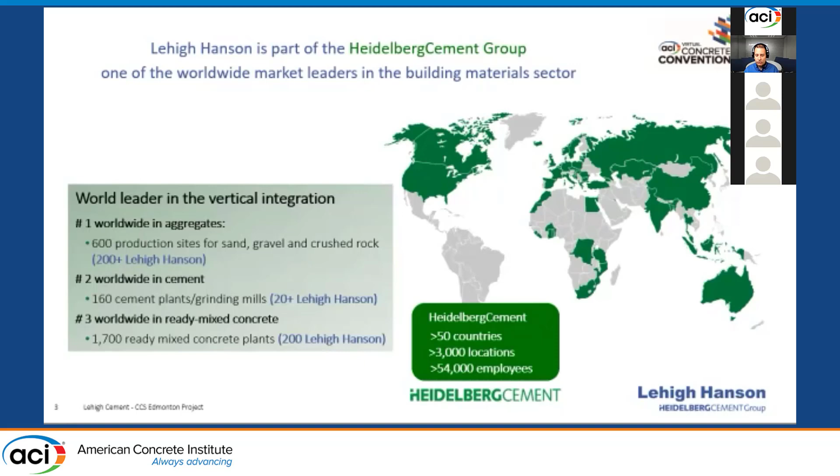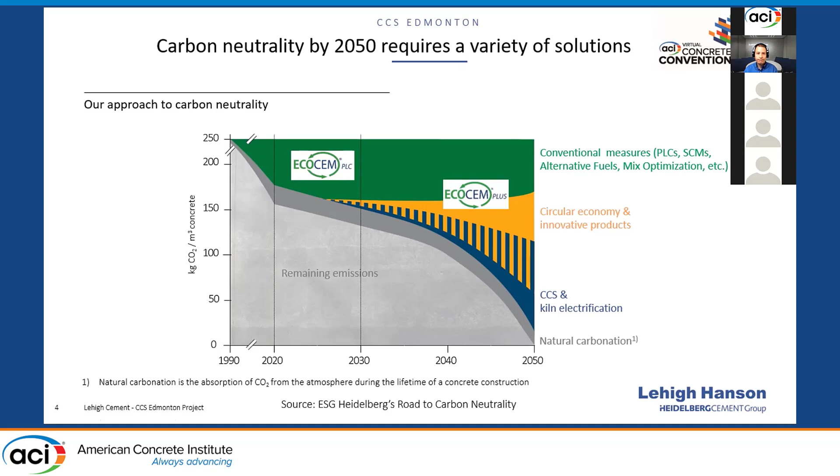Let me start with a brief description of each, and then I'll go into the next slide, which has a video that does a much better job of explaining it, showing exactly from the cement process how each of these technologies works.

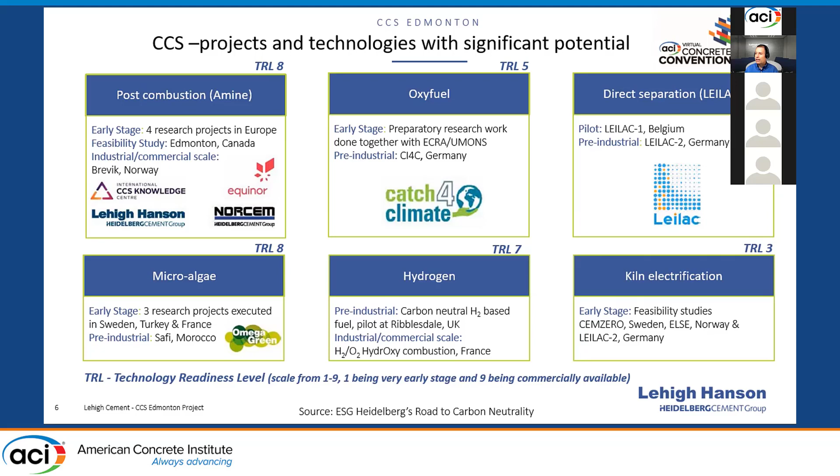Okay, so without further ado, I will start a quick video here and hope that this enlightens. It's very basic, but it does give a much better perspective of each of these 3 technologies that I just shared with you.

Reducing CO2 emissions while producing enough cement to meet demand is a global challenge. Heidelberg Cement invests in groundbreaking technologies, focusing on capturing the CO2 at the end of the conventional combustion process by installing a CO2 capturing unit.

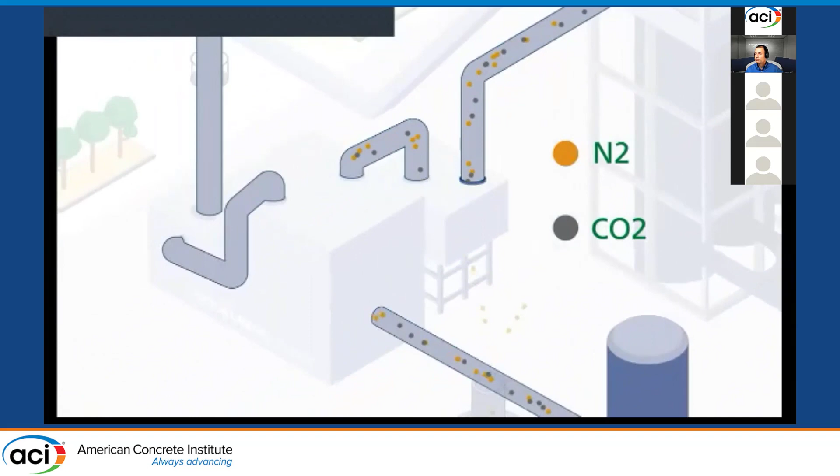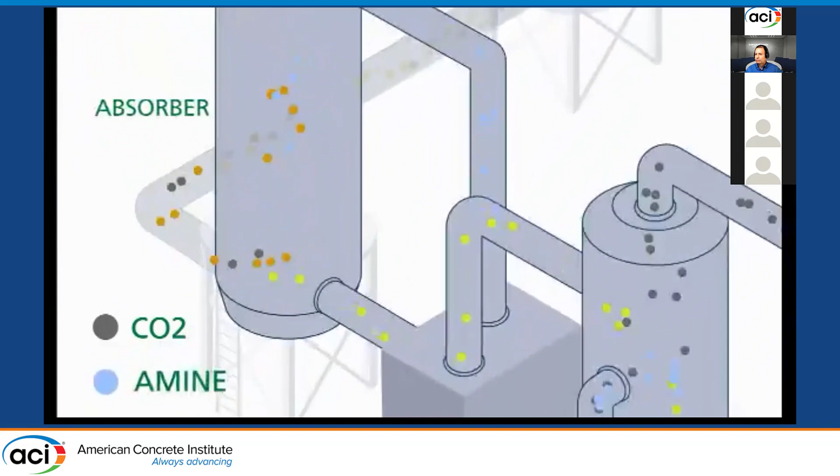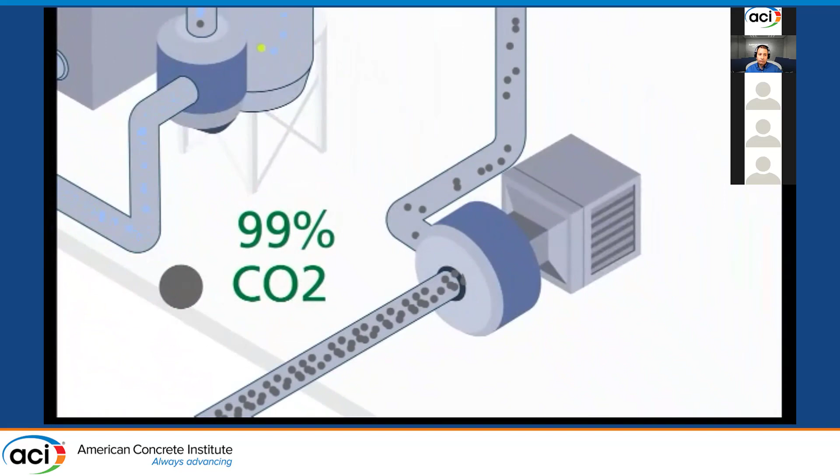The nitrogen and carbon dioxide usually released by the process are redirected to this unit and cooled down. While the nitrogen is released, the CO2 reacts and binds with an amine liquid in the absorber. The resulting rich amine is heated up so the solution splits again into CO2 and amine liquid. The CO2 obtained is about 99% pure. It's directed into a compressor to be transported away.

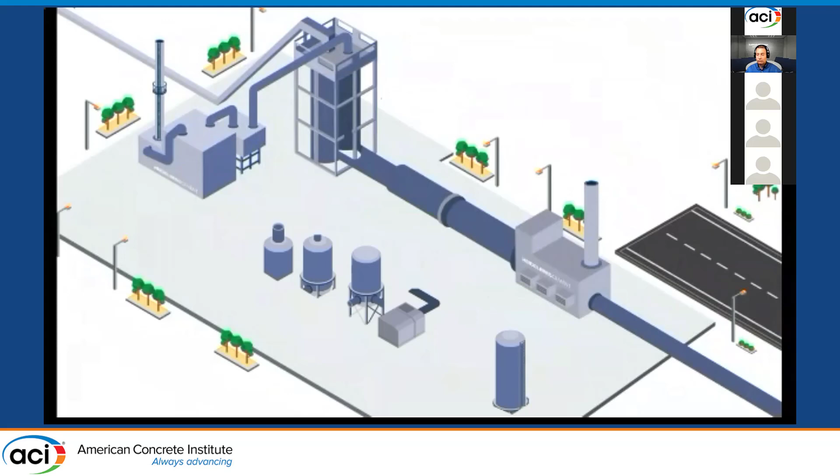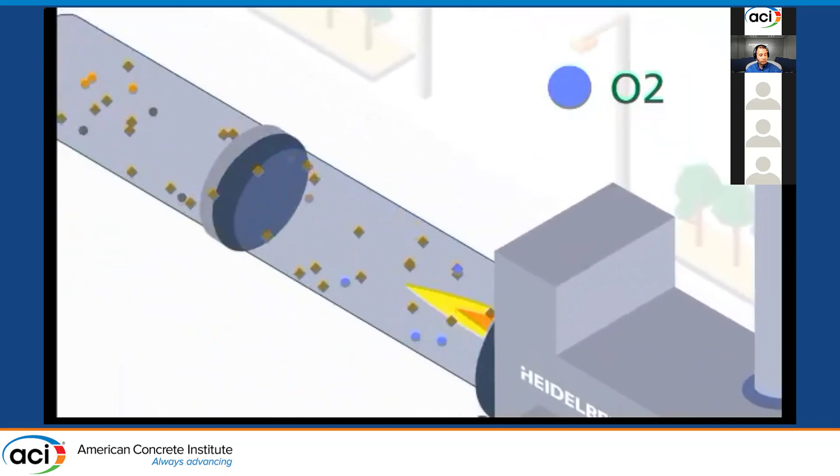A second technology to capture CO2 in cement production is oxy-fuel combustion, a process in which combustion occurs in an oxygen-enriched environment. In this procedure, there's a first step where pure oxygen is added to the process instead of air to improve combustion. The exhaust gases are recirculated to the burner. The second step is at the end of the process, where the gases are redirected to the CO2 capturing unit.

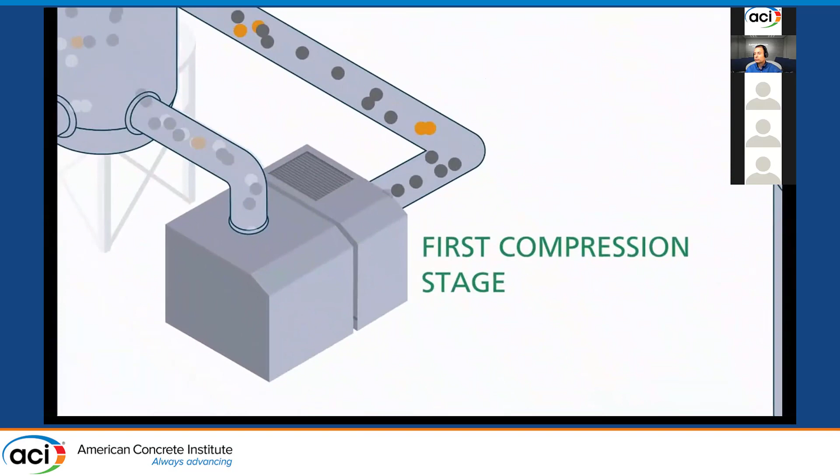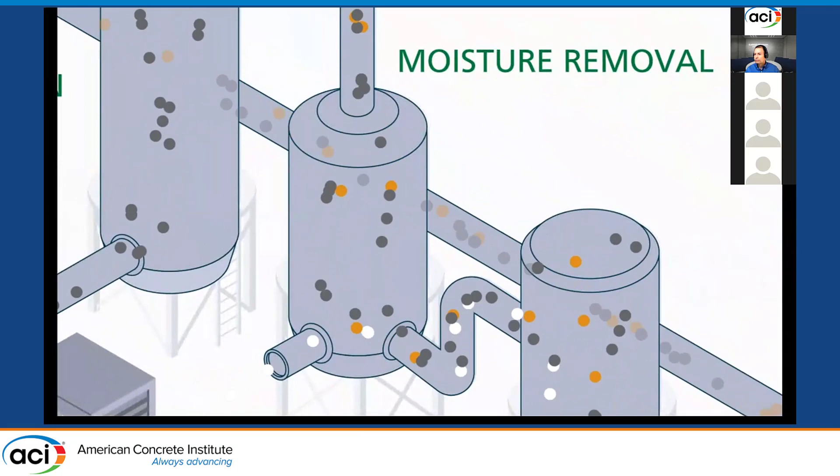They pass through a first compression stage. Sulfur and nitrogen oxides are removed. Moisture is removed by condensation to avoid corrosion. The physical separation of the remaining gases displaces the nitrogen, and the share of CO2 rises up to 90%.

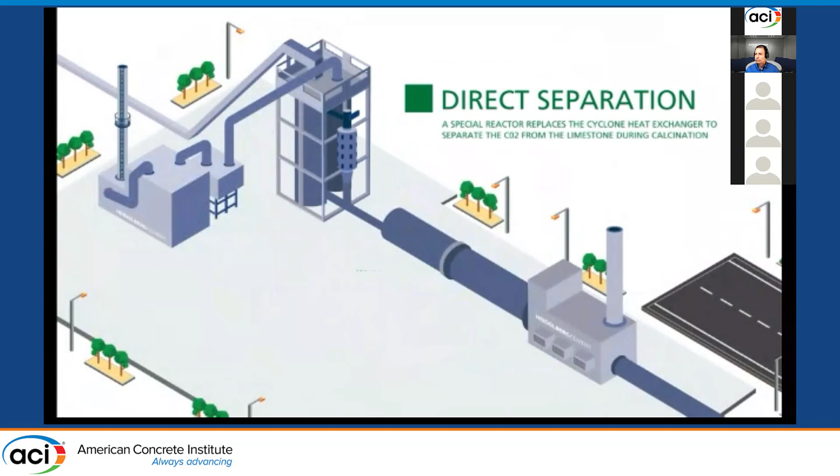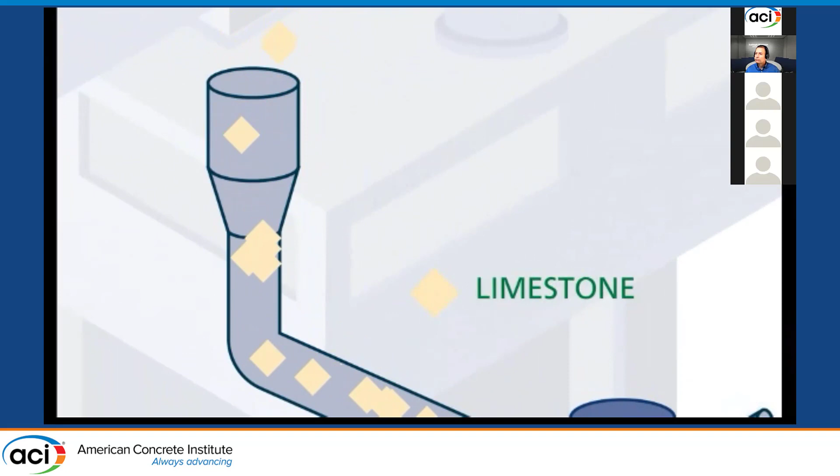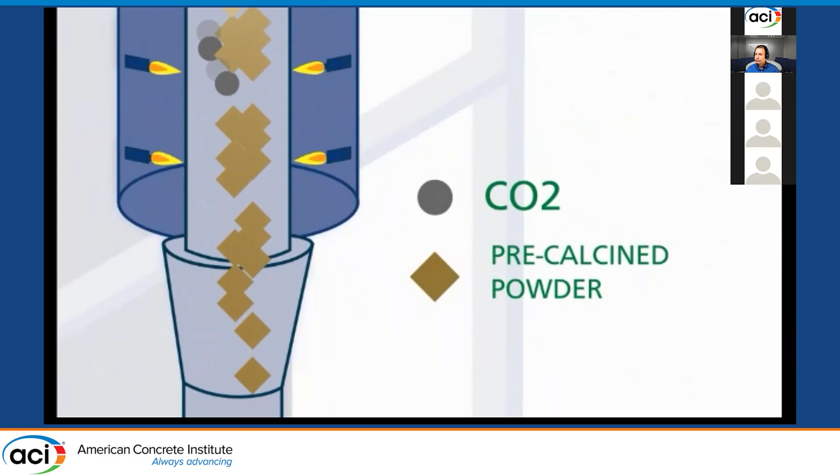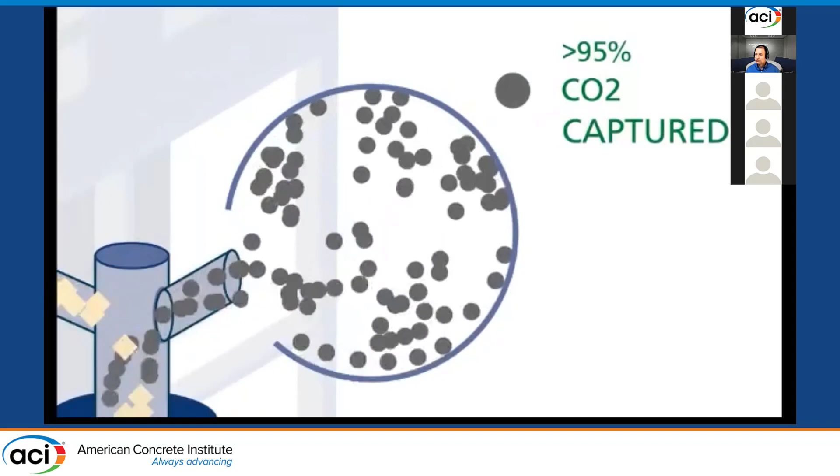A third technology is direct separation, in which a special reactor replaces the conventional cyclone heat exchanger. For this process, limestone is slowly poured into this high-temperature reactor, heated to about 1,000 degrees. It immediately splits into lime powder and carbon dioxide. The separated CO2 is not mixed with the flue gas of the combustion process and is therefore more than 95% pure. This means it can be captured and used right after the cooling process.

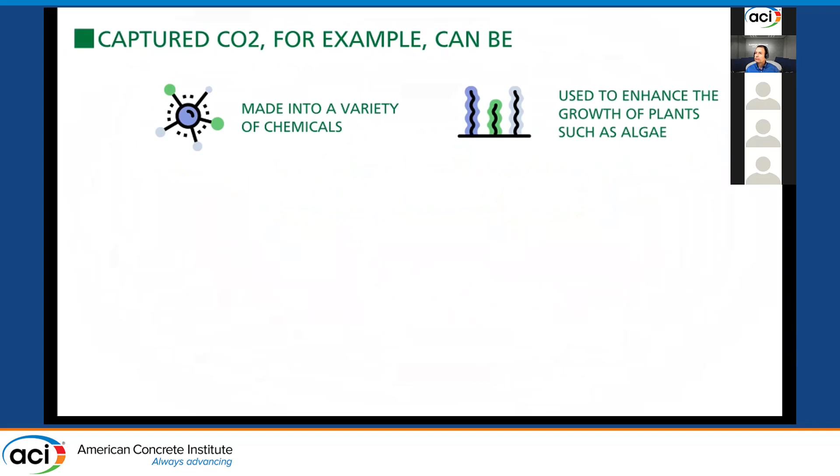But what happens to this captured CO2 which does not get emitted into the atmosphere? Well, it could be used in many ways: to produce chemicals, enhance plant growth, be transformed into synthetic fuels, or embedded in new concrete, or used to carbonate recycled concrete. CO2 could also be safely stored offshore or onshore.

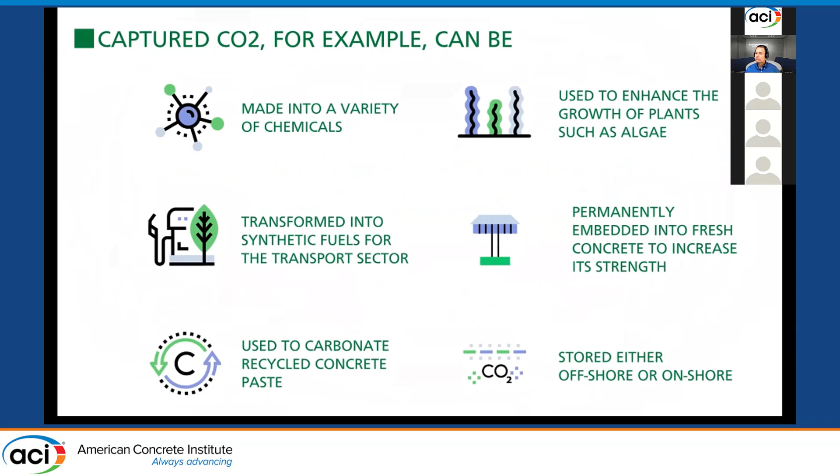Heidelberg Cement, continuing to reduce our impact on air, land, and water.

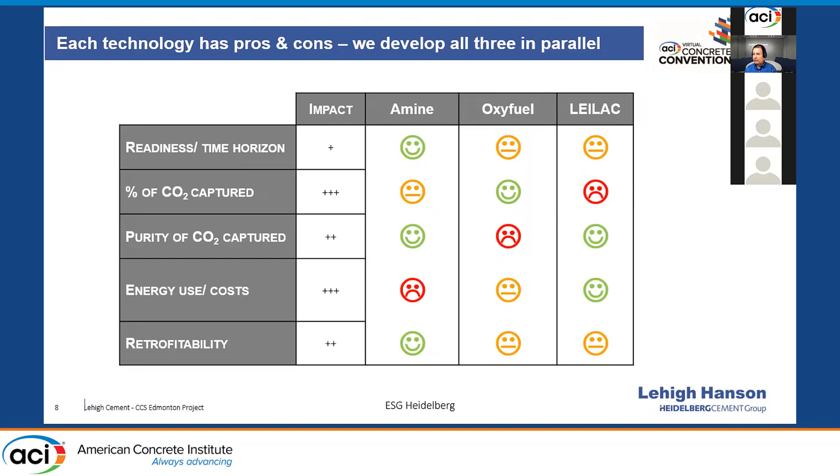One of the things this table does is look at all three technologies, and we've recognized that not one single one is perfect. They all have pros and cons. The one we've adopted in Edmonton, and the reason why, is the post-combustion using amine solutions, which shows the highest technology readiness level and has the most benefits compared to the others. Not to say the other ones won't be successful, it's just that in terms of readiness for deployment, post-combustion amine is the one we're looking at.

This project is certainly very unique within the CCS Heidelberg domain. One thing I do agree with Ken, whose presentation just finished, is that carbon capture technology is just starting. However, I'd argue that in the cement industry it's just starting, but we've seen other industries already implement it, and they've been operational now for a few years.

A perfect example is the power industry in Canada through SaskPower in the Boundary Dam project. They've done carbon capture and storage using a post-combustion amine technology similar to what we're implementing, and it's capturing close to 1 million tons of CO2 per year. It's been working successfully for a few years now. So the technology is there, although not necessarily in the cement industry, but there are a lot of lessons learned.

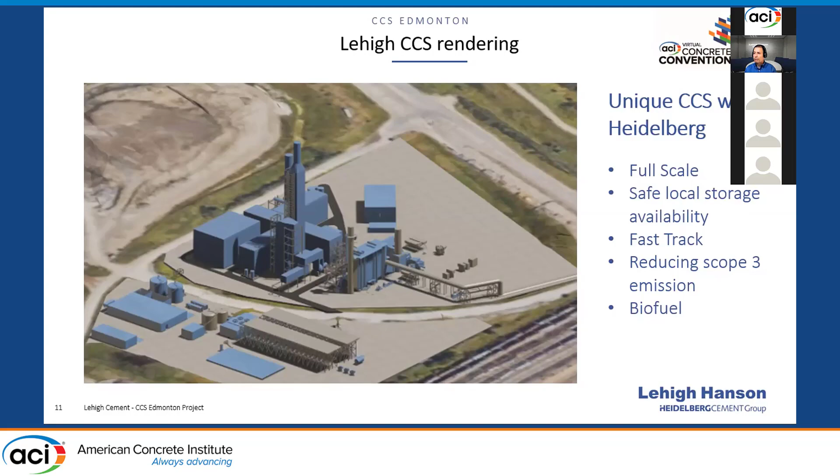One of the learnings from our feasibility study, which we'll explore further in the FEED, is the use of these biofuels, which can potentially create a potential for negative emissions, quite frankly. So this is a rendering we've created to show in a simple way the process.

This doesn't stop at the carbon capture operation or the sequestration, but also looks at the carbon value chain - once the CO2 has been captured and secured safely and permanently, environmental attributes are generated. Those environmental attributes can come through carbon offsets or emission performance credits.

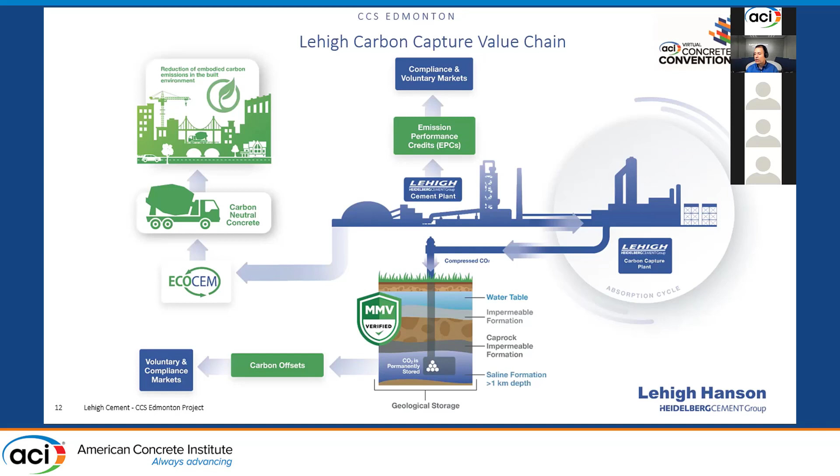But also on the cement side, we have an output - now we'd have a carbon neutral cement. And that carbon neutral cement could feed and serve the concrete industry to make carbon neutral concrete, and obviously feed into the reduction of embodied carbon emissions in the built environment, which I was alluding to with the reduction of scope 3 emissions.

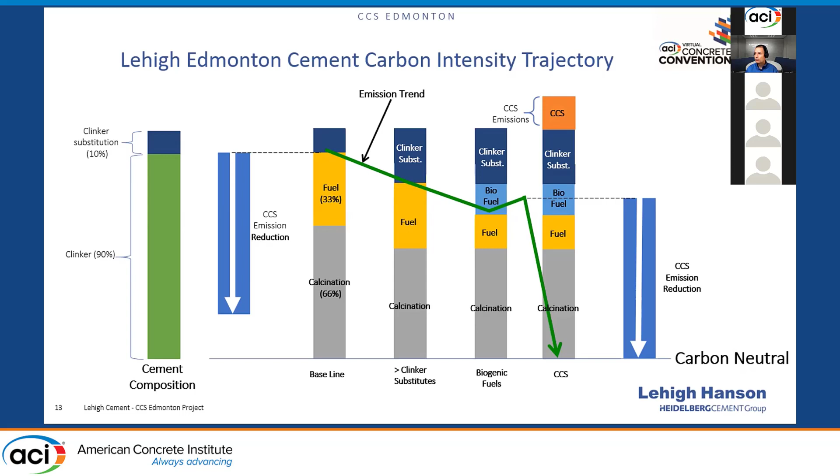It's important to talk a little bit about the sequestration or storage component, because quite frankly, carbon capture and storage will not give you any environmental attribute if you don't securely, safely, and permanently get rid of the CO2 through storage, for example.

And you might ask yourself, how safe is sequestration? In fact, it's quite safe, and data proves it. Over a decade of historical data used by other projects, not necessarily in the cement industry, but in other industries like Shell Quest, Boundary Dam, which I referred to. The other projects are Northwest Redwater Partnership, which is a refinery, and Nutrien's Redwater Fertilizer Facility, which are both using the longest available CO2 trunk line built in Alberta, called the Alberta Carbon Trunk Line.

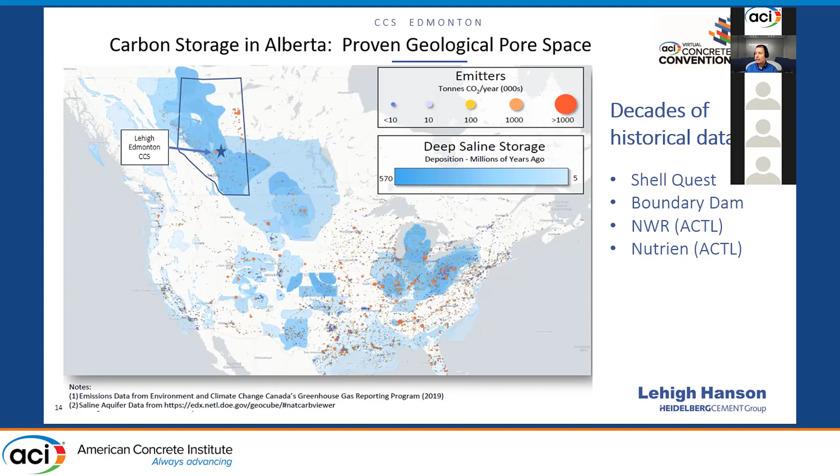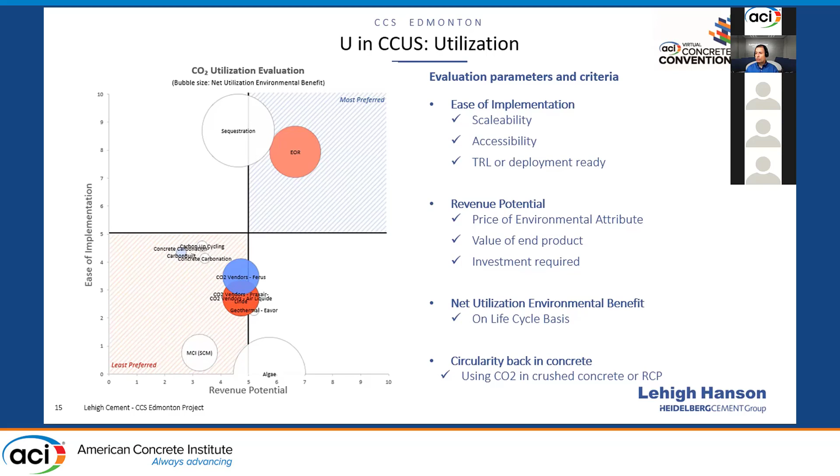Accessibility and deployment readiness is also key, and was part of the evaluation. Revenue potential is important too, taking into account different regions with different cap and trade regulations, or in Canada's case, the output-based pricing system, parallel to setting a carbon price, which is known to be increasing substantially to the tune of $170 Canadian dollars per ton by 2030. So there's certainly a lot of incentives for us to be doing this, but I wanted to show this model, which shows we've looked at all the other opportunities, and we might consider smaller ones in scale, but at this point, sequestration is the one that makes sense.

Last but not least, I want to leave you with where we stand on the project. The project typically takes anywhere from 4 to 6 years. We have completed the feasibility study and will start the FEED study shortly. But we're going to fast track it so we can overlap FEED and deployment, so we can be operational by 2026. That's our goal, to be operational in the year 2026.